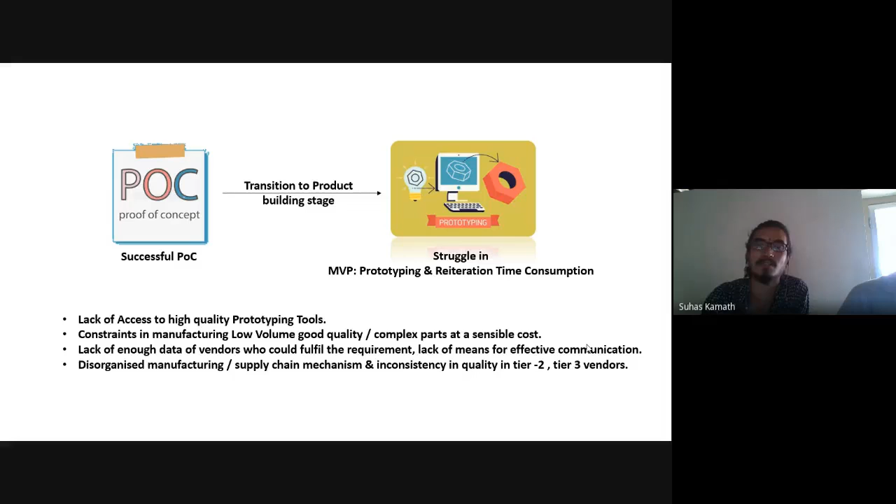The scale is more in a production run and less in an MVP, but the amount of effort needed in terms of technical inputs and human effort is more.

So during the MVP process of building products in the early startups we worked in, and also based on inputs from our friends in the industry, for a small scale startup or small and medium scale industry, access to high quality prototyping tools was less, at least around 4 or 5 years back.

Now the Karnataka government has started initiatives like common instrumentation facilities, like the KTech Innovation Hub, where they are pooling all kinds of prototyping tools at one place and making it accessible to everyone. But still, access to high quality prototyping tools is less, at least at our disposal, physical access.

Then there's manufacturing low volume parts. If, for example, we need a casing that's injection molded, going for injection molding will be very cost heavy. Then if you want to go for 3D printing, the right process in 3D printing is necessary. If it's not possible in FDM, we have to go for SLS, and again access to that becomes a problem.

And if it comes to PCB or something else, having proper data of vendors who could fulfill the requirement is one challenge. At the same time, as a startup, there are lots of things to figure out during manufacturing which we might not know. Proper communication and information sharing between the industry and the potential customer, who is a startup, is lacking. As a whole, this tier 2, tier 3 manufacturing sector, which has potential to cater to the low volume needs of a startup, is highly disorganized.

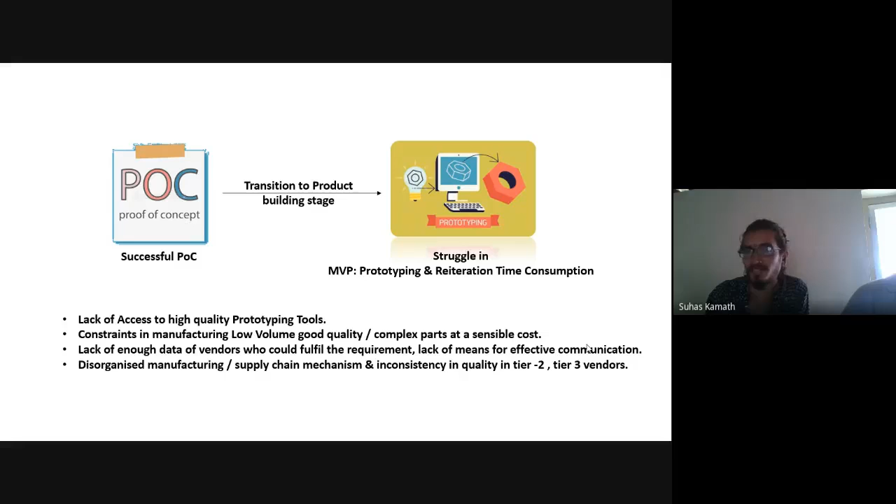Since then, after exposure to different aspects of manufacturing and the process, we thought, why not start up in this field, around 2019-20. We started to speak with potential customers, speak with vendors around 2019, and started to scout for printers and other resources.

Design, thinking of an idea, thinking of setting up a process is one thing - then setting up a business is a whole new ball game. One of our friend's father, who is a CA, helped us with what are the basic things required, what is enough, and what can be acquired later. Like every startup goes for private limited or LLP registration, but not every startup needs to register for the same - can start as a proprietorship or partnership, etc.

In STELNA Designs, the problem we are basically trying to tackle is reducing prototyping and manufacturing time, especially for small and medium scale industries or startups, and catering to their low volume needs - including low volume needs of complex geometrical parts, and customized requirements where there could be machinery imported from abroad whose spare parts might not be available, requiring customized parts to be designed and given to them.

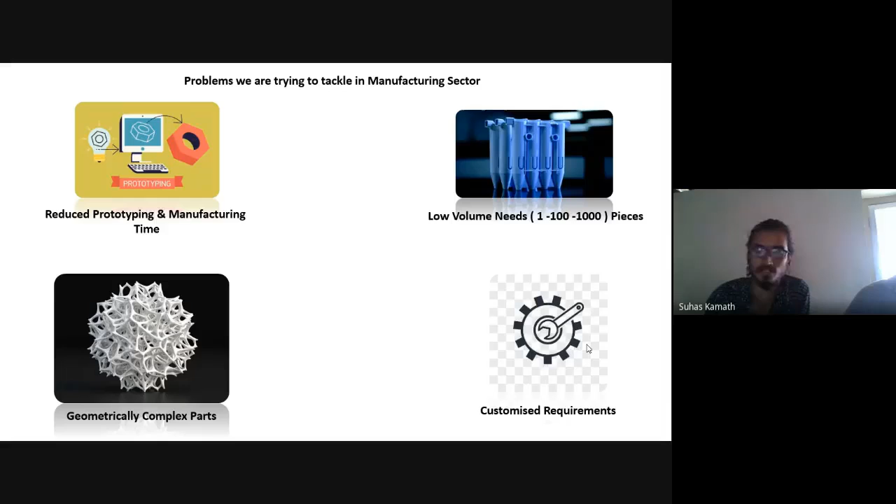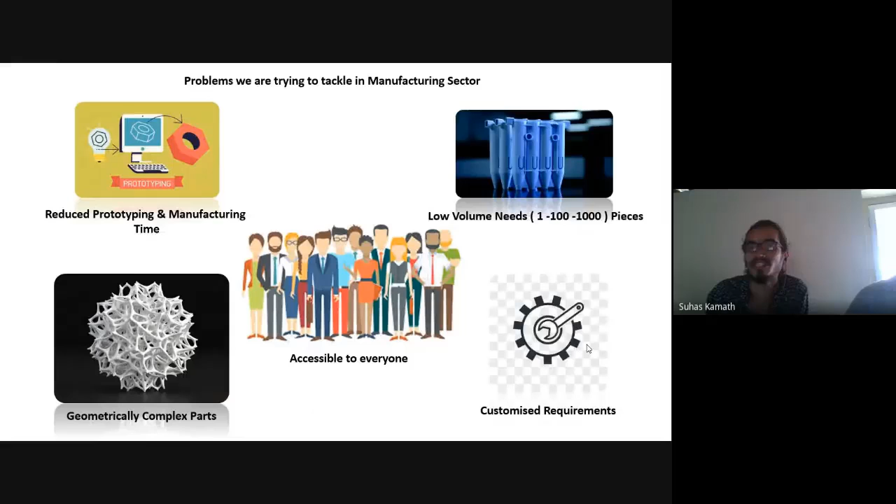Making it accessible to everyone is the core point we are trying to tackle. Irrespective of the background a person has, irrespective of the contacts he has, irrespective of the exposure of the company he represents, manufacturing techniques must be as easy for an industry and as easy for a layman if he wants to build a product. This is the long-term goal we are chasing. Our aim is to build solutions and services in the coming days which help us achieve this target.

As a company, we are not just targeting 3D printing, we are catering to the needs across the 3D printing ecosystem, whether it's designing 3D printing services, educating industries regarding the field, etc. In 3D printing services, we provide services across all the major technologies like FDM, SLA, SLS, metal printing, etc.

As I touched on earlier, different types of applications need different types of technologies, and access to all those technologies might not be available in maker spaces, incubation centers, or service providers. So access to those technologies is one thing. And low volume manufacturing - the CAD model is the fuel to 3D printing or manufacturing services these days. So product designing services, consultancy, use case analysis, and 3D printability in a particular industry.

The penetration of 3D printing, the possibilities of 3D printing, are huge, but finding out what the possibilities are in an industry is a huge task. So that is what we are trying to do.

We also provide services for setting up additive manufacturing process setups, whether it's software, 3D printers, or the production process, for industries, colleges, incubation centers, etc.

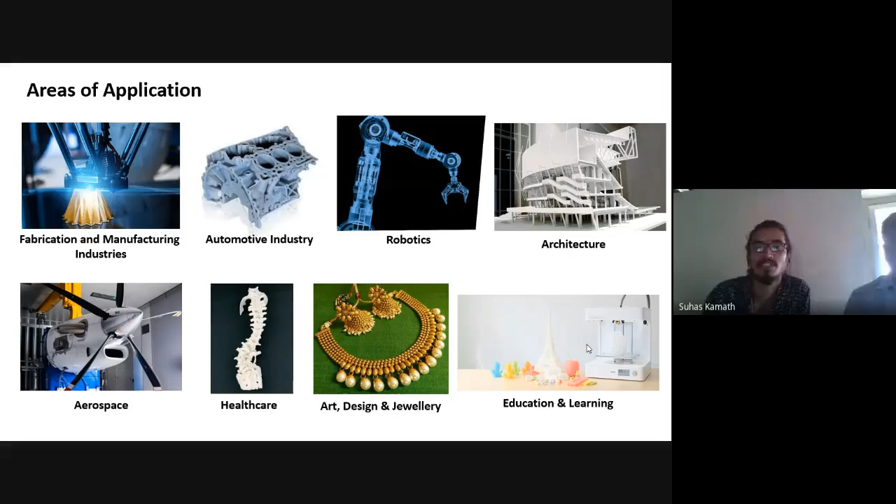So certain observations and views which we encountered during our operation period over the last 7 months, like the term called digital manufacturing.

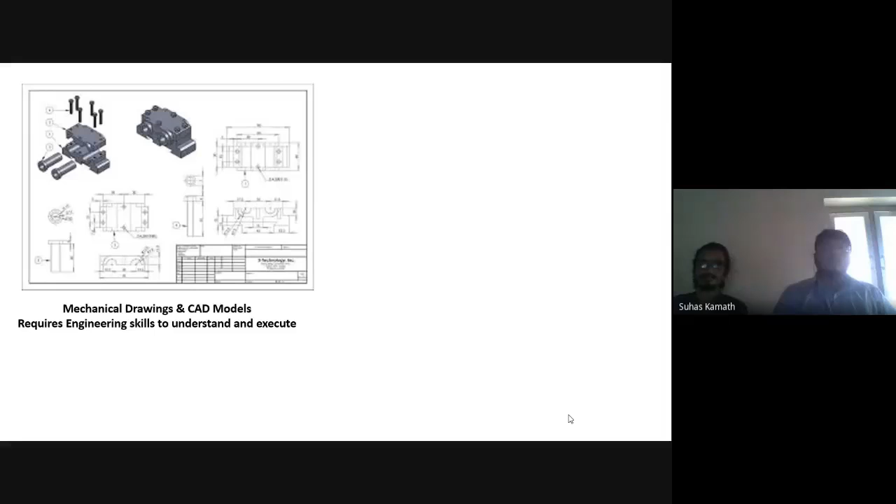If a product has to be manufactured, we have to have a design or a mechanical drawing of the part. Then we have to make a CAD model, and the guy making the design and the CAD model doesn't have to worry about the manufacturing process. Then an engineer has to sit and analyze the given requirements, the design features, or the surface finish of that part, and plan for the manufacturing process.

This might be cumbersome and might take time for the product design process. This thing is being solved by 3D printing and also digital manufacturing, where the main advantage is that a person doesn't need to explain or give the features of the product.

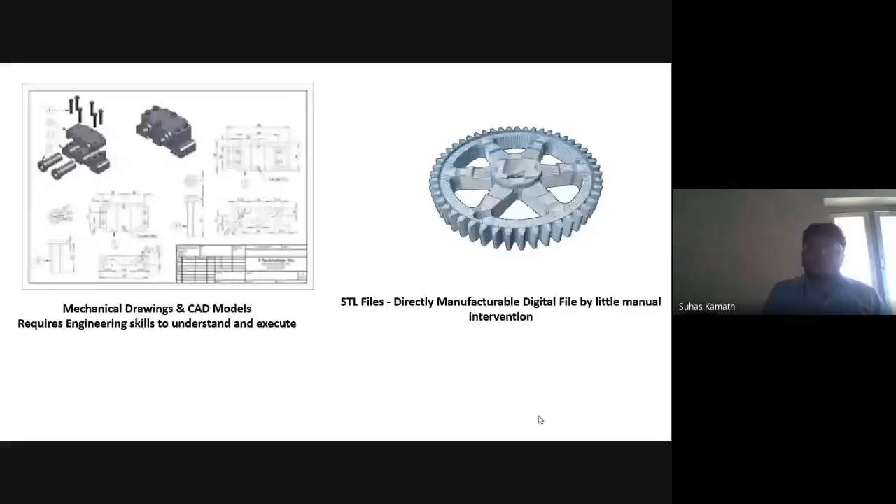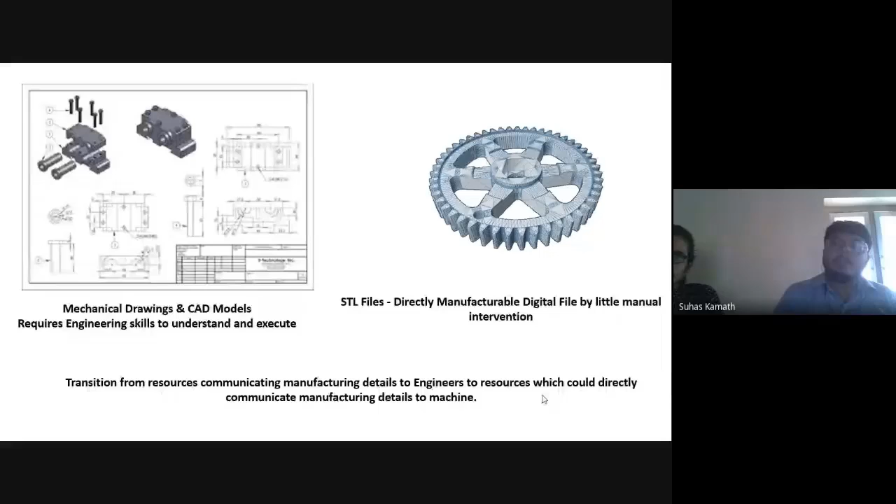Instead, the file itself communicates with the machine, and it explains its features and plans. This is a revolution in manufacturing technology - the transition from resources like mechanical drawings, explaining to an engineer the process to be chosen, to the resources itself communicating with the machine about its features and details.

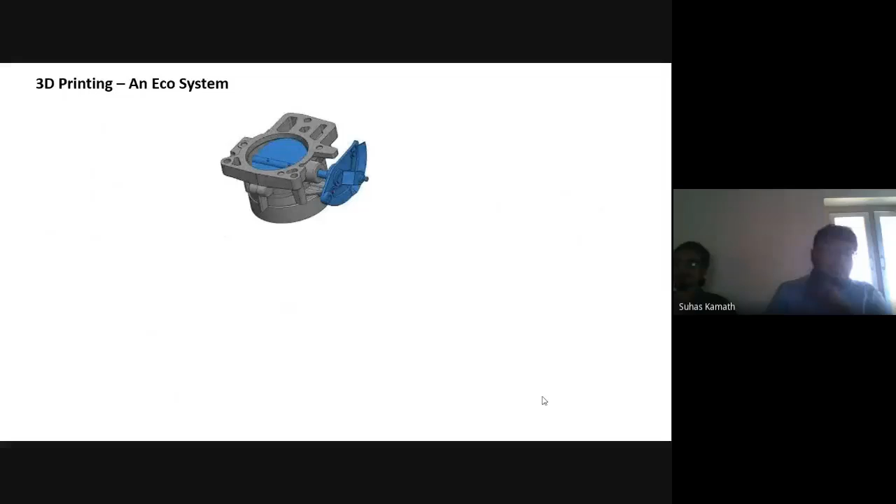So 3D printing doesn't only depend on the machine, but there are processes involved before and after 3D printing, like software involved in designing and slicing of the models.

Right now, software is used mainly for CAD designing, but the advent of 3D printing has made even software manufacturers embed certain codes and features about 3D printing inside their design software itself, making it easy to export a design file in the required format.

The exported file also needs to be kept in a certain orientation, and required processes need to be done to get a good 3D print, depending on the application of the product.

Then comes the machinery, where choosing the right process of 3D printing is needed to get the required part done according to the application. Monitoring software is also present, where you can monitor the real-time progress of the part, and if any changes are required, they can be done remotely.

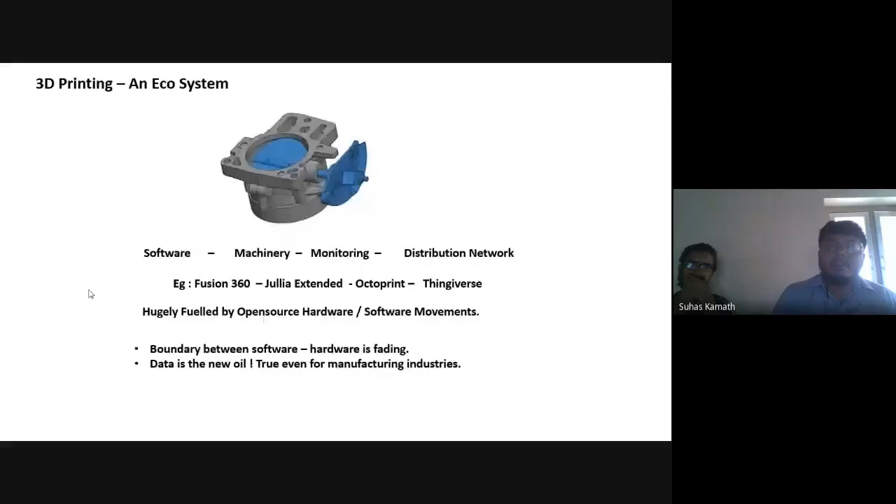Here are some of the products which we came across or developed during our last 7 months. We will share some insights about these products. One of them is a customized gifting product which a customer wanted. One of the major applications or advantages of 3D printing is increased customization, where each and every part can be iterative and customized according to the customer's needs.

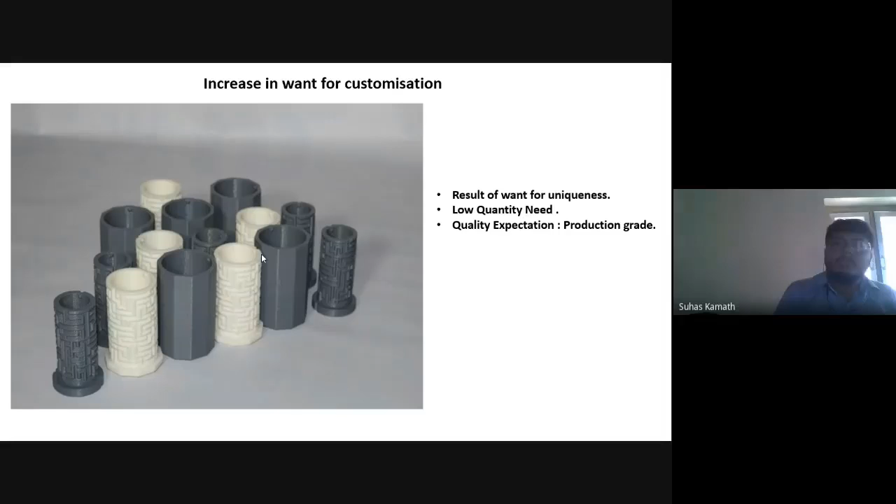If a person needs a low volume gifting part or any part of his choice, he doesn't know the processes to be taken care of, or doesn't have contacts of manufacturers to get his part done. One such example was this customized gifting product shown on screen. The client had seen the part on the internet and couldn't find it in India, or it wasn't available for sale in India. So he took help of a website, bought the files, and shared them with us. We were able to produce that part within a week and shipped it to him. The main requirement was that they have to have the part, but it also has to be of production grade. This was one of the learnings we got from this application.

The problem in manufacturing this gear is like we are currently explaining the problems faced in tier 2, tier 3 cities, as we are based out of here. A casting industry had a problem of manufacturing a gear of diameter around a meter. They didn't have tools to do gear tooth cutting, so either they had to get it done from Bangalore or some other place. They thought of doing a casting of that gear, and had various plans on how to cast the product itself. They tried processes like laser cutting and stacking sheets of acrylic to make the casting pattern, but that didn't work out.

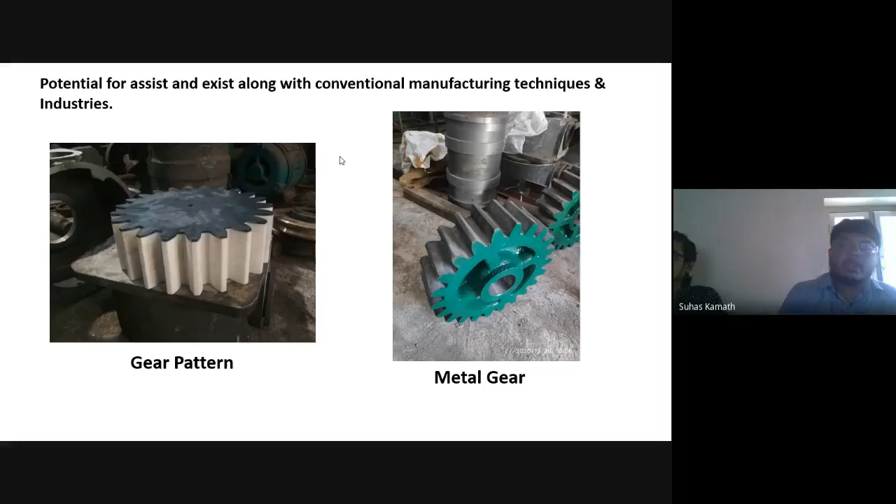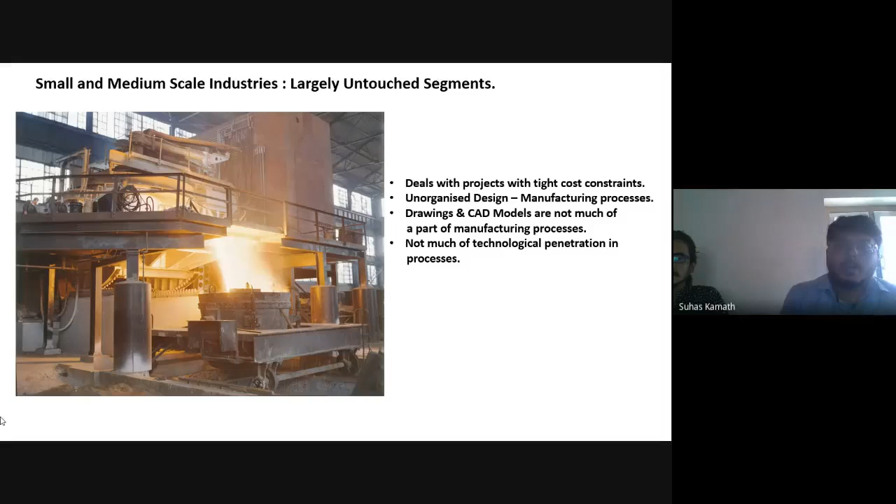One of the major problems in small and medium scale industries in small cities is that they are unorganized, but they have skilled laborers and limited tools to cater to the opportunities they get. Most of their products have tight cost constraints but high complexity. These kinds of problems can be solved with 3D printing, as these industries are not much advanced in technologies like 3D printing and advanced manufacturing processes. So introducing or explaining how 3D printing and additive manufacturing processes can help them would be a major segment of the market in the present scenario of Indian manufacturing.

Let us see how a design for additive manufacturing process can be done for an example part, where 3D printing slicing is one of the major aspects of how part quality should be obtained after printing. 3D printing is not just producing a CAD model, slicing it, and printing it in a 3D printer. Instead, planning of how the orientation of the product has to be done, keeping in mind the application and geometry of the product, certain decisions have to be made on the orientation, the layer height, the support needed for the part, the infill of the part, and the infill patterns, which give various strengths for the part depending on the application.

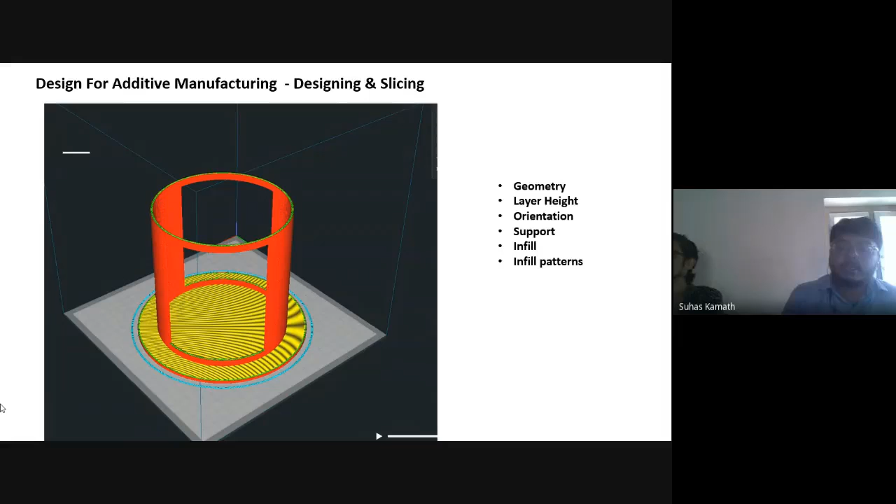After 3D printing, some post processing needs to be done because the 3D printed part in FDM or FFF doesn't have a finish like an injection molded part. So certain post processing has to be done, especially if we have to give the part to a client, since client expectations have to be met.

For FDM 3D prints, sanding or grinding the surfaces has to be done so that the surface finish of the part will be good. For resin prints, curing of the part can be done using UV light, and chemical treatment with acetone or isopropyl alcohol is used for smoothing the surfaces. Certain surface finishers and painting can also be used for post processing depending on the application.

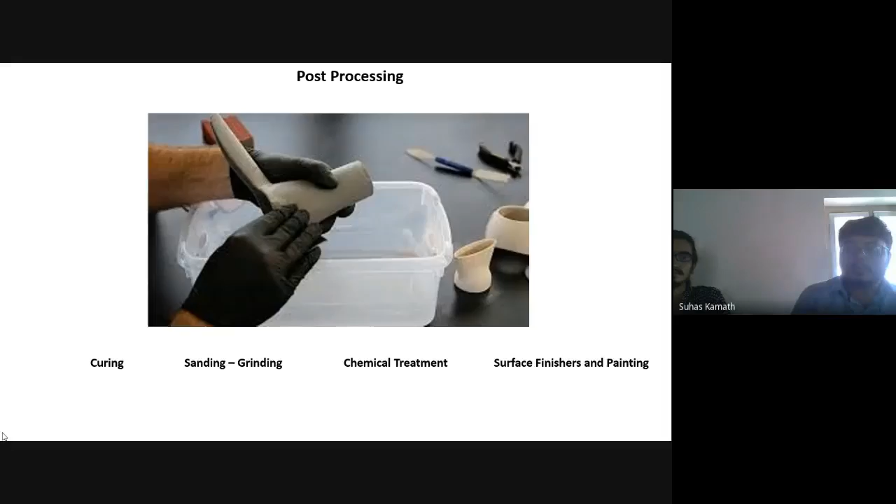One more major area in 3D printing is DFAM, or design for additive manufacturing. 3D printing does not have career opportunities in just printing itself. Just having a printer and printing parts is not the only option, but 3D printing has various job roles - a major one being CAD modeling, and slicing or orienting the part is also becoming a major career option, where certain softwares are mainly built to have good slicing features.

Post processing of 3D printed parts is also booming. Career opportunities in post processing is also one of the major aspects for the growth of 3D printed applications across the platform.

Coming to STELNA designs, we plan to make digital manufacturing easy for everyone in India - to accumulate not just 3D printing, but all allied manufacturing processes and take it online. So if anyone needs a part or product remotely, they can upload or give information about that online, and it can be further processed. Right now we have that service available for 3D printing, where you can upload a file and we can get it done according to your requirement and your priorities.